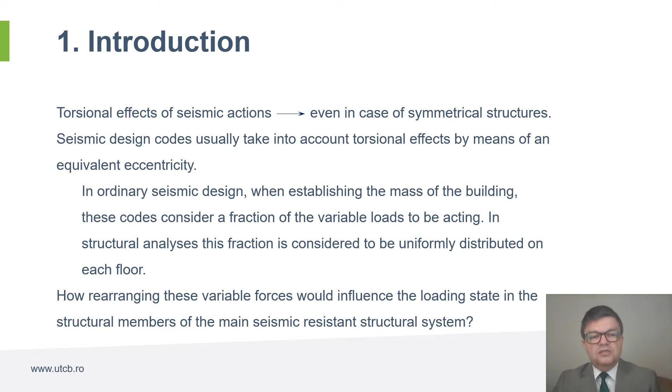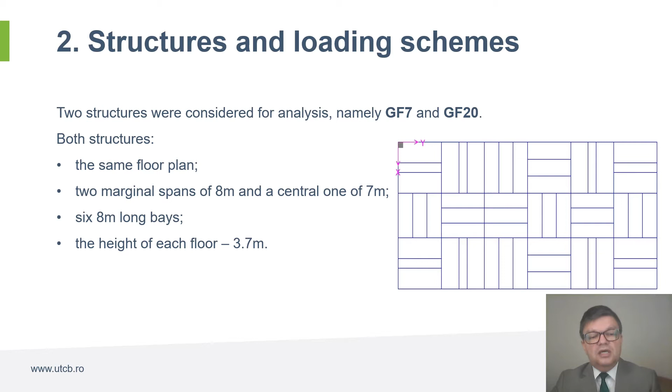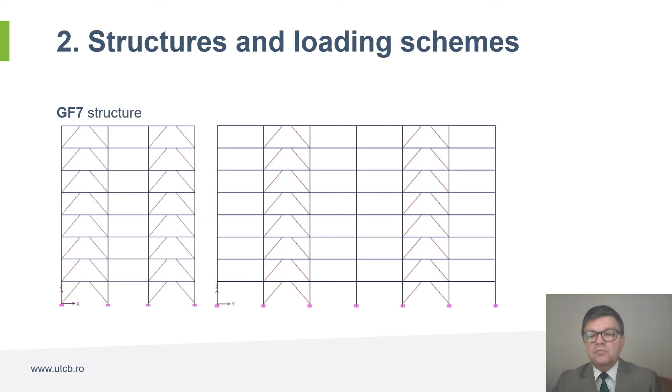We considered two structures having the same floor plan, one with 7 stories, another with 20 stories. The spans and the bays are about 8 meters, and the height of the floor is 3.7 meters. The eccentrically braced frames are placed on the side frames. For the 7-story structure we have this scheme, and this one for the 20-story structure, which also has an outrigger system.

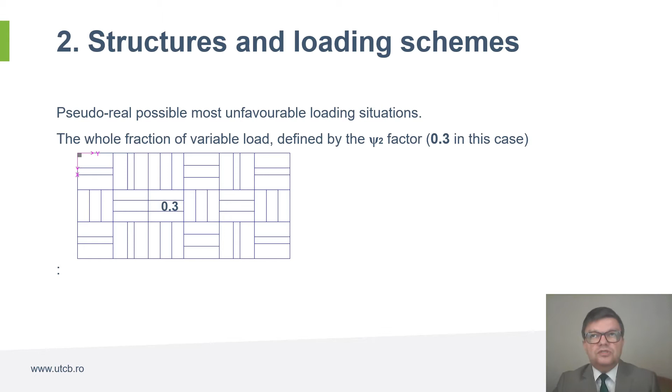Pseudo-real possible most unfavorable loading situations were considered, starting from the fraction of the variable load used for determining the mass. In this case it's 0.3 for office buildings, and we consider this load to be agglomerated on one side in the most unfavorable position, with a maximum factor of 1.5, which corresponds to the persistent design situations where the variable load has the dominant effect.

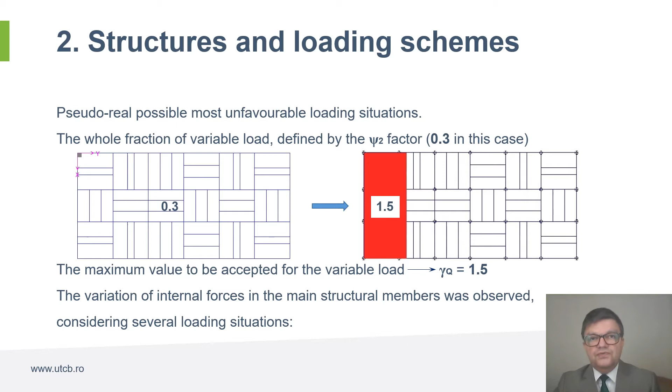Under these circumstances, we got 5 loading schemes. One is centric, used for reference. Then eccentric, which is what is used in seismic design codes, with an eccentricity of 5%.

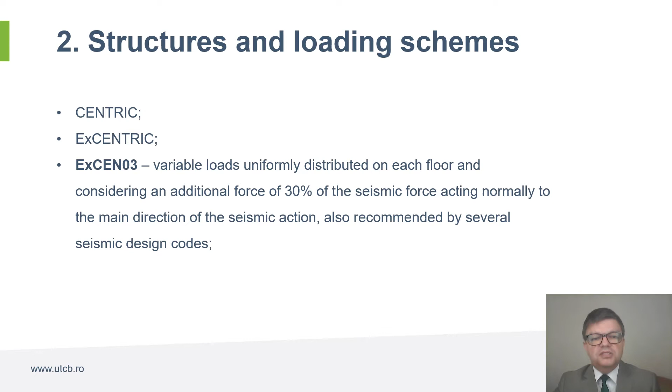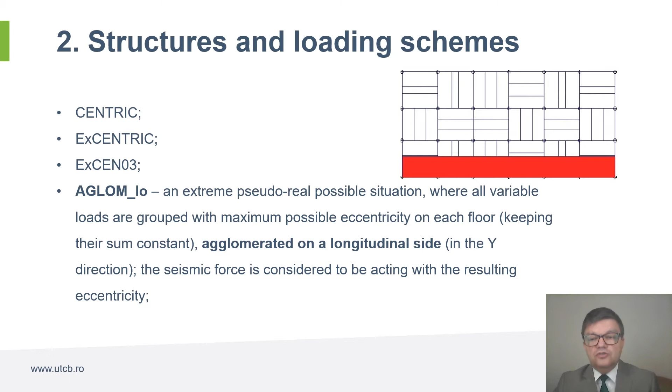Then ExCEN03, another loading situation from the codes, which considers the seismic force on one main direction of the building and 30% of the seismic force on the other main direction. Finally, we took two loading schemes that we considered: the variable loads agglomerated on the longitudinal side and on the transversal side.

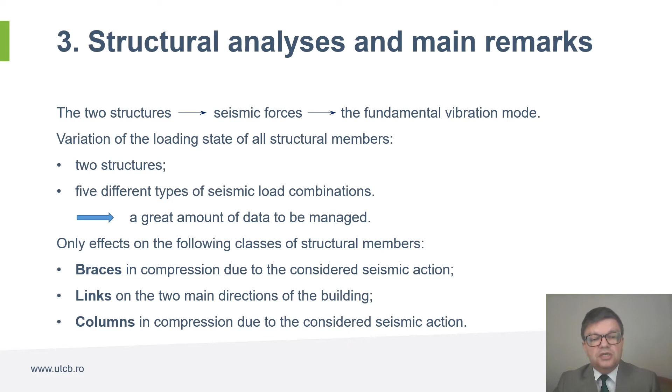Using these schemes, we analyzed the two structures and got a great amount of data. That is why in this paper we focused only on the braces in compression, the links, and the columns in compression due to the action of the seismic force. So we looked at the compression force in the braces and in the columns, and the shear force in the links.

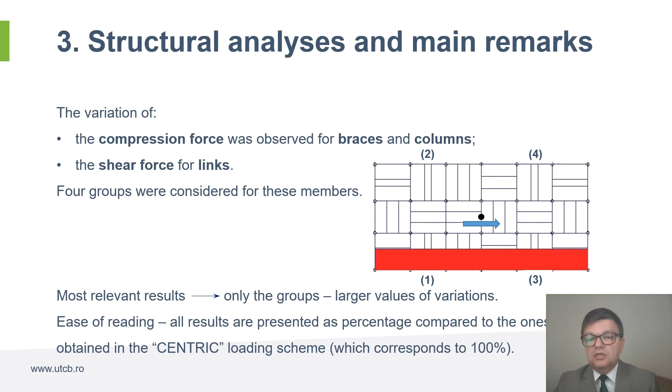We looked at the most loaded structural members, groups 1 and 3 on this image, where the torsion effect is more important than in groups 2 and 4. All references are made to the centric situation, considered to be 100%. So let's look now at some results that we got.

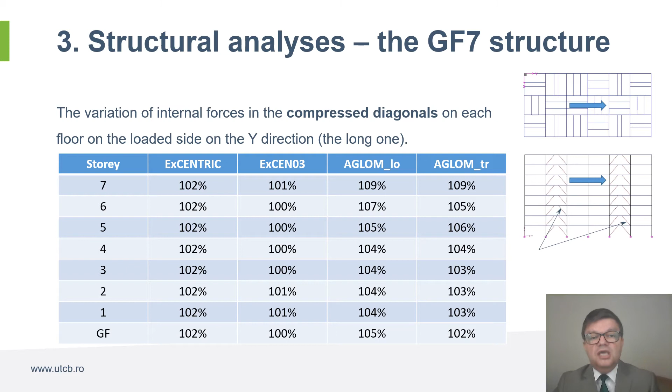If we look at the longitudinal direction, the influences are smaller but the same trend remains. Now we'll have a look at the links.

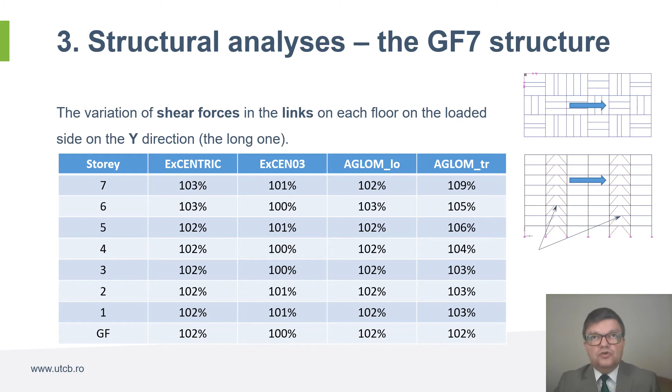And what we could notice till now, and keep on noticing, is that ExCEN03, considering the 30% action on the normal direction, doesn't bring much.

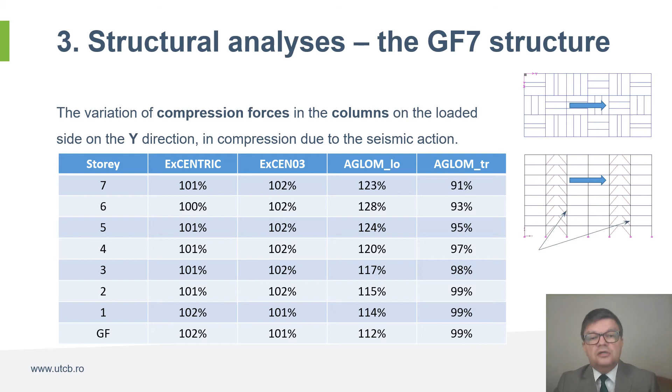Similarly, on the longitudinal direction, with somewhat smaller values.

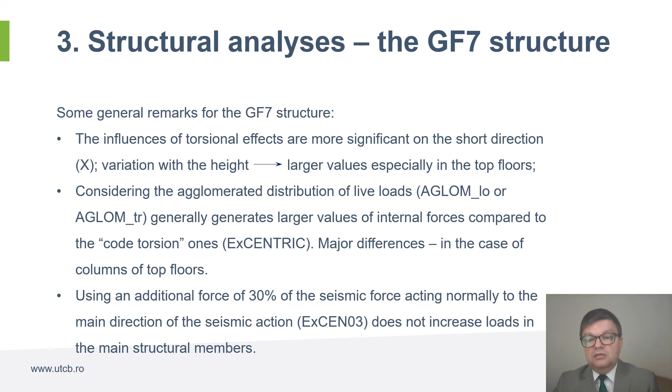To summarize some conclusions for the 7-story building: the torsional effects are more significant in the short direction, and agglomerated distribution generates larger values than what code torsion brings, with the major differences being in the columns at the top floors. Again, introducing the 30% force normal to the main direction of the seismic load does not bring anything important.

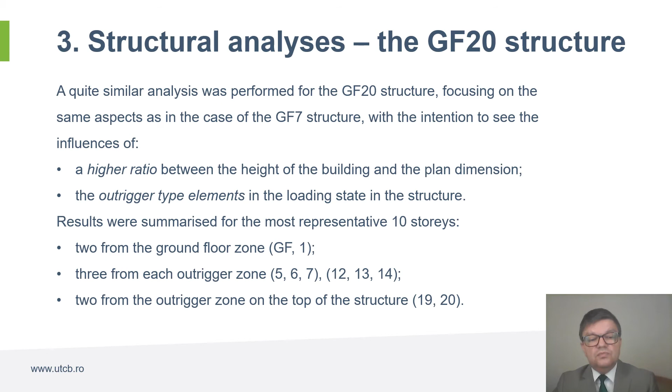Now, moving to the 20-story building, we considered the results in the most representative 10 stories: 2 from the ground floor, 3 around each outrigger zone, and 2 from the upper floors.

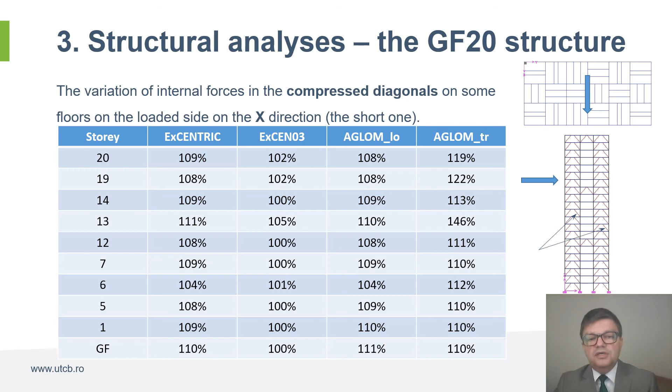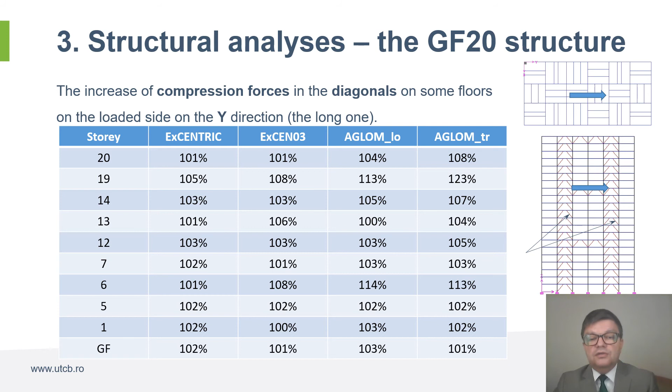Moving to the longitudinal direction for the diagonals, we see the same trend, increases but smaller than for the shorter direction, with concentrated increases in the outrigger part.

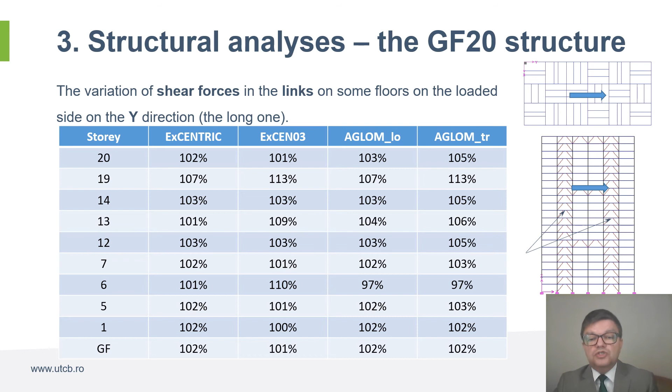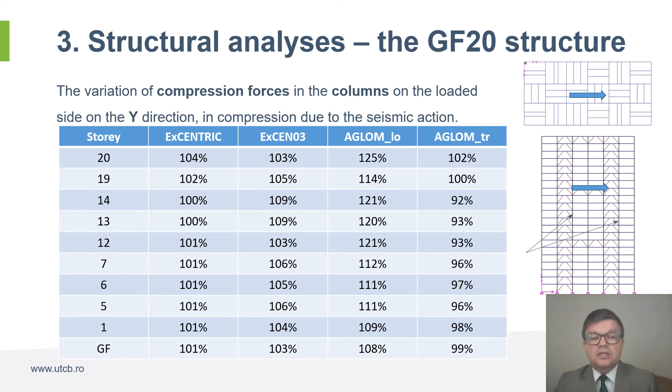Again, on the longitudinal direction, smaller values, and similarly for the compression forces in the columns, with increases of up to 30% in the neighborhood of the outrigger systems, and somewhat smaller values on the longitudinal direction.

To summarize some conclusions for the 20-story building: the effect on the short direction of the building remains more important in this case too. The agglomerated distributions we imagine give values larger than the code approach, and again the 30% approach doesn't bring much.

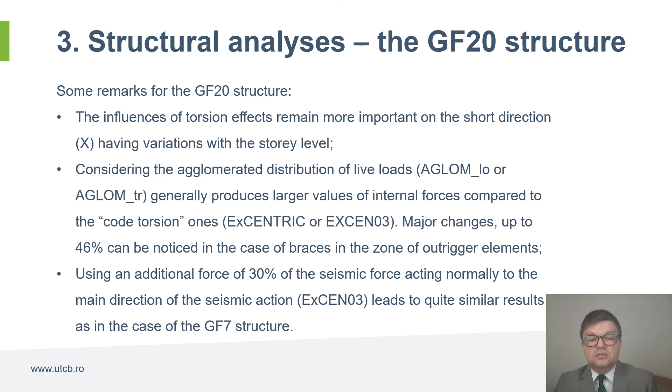Moving to conclusions: the effects of general seismic torsion are more important on the short direction of the building than the approach used in present-day codes. The 5% eccentricity is reasonable for this case, discussing an office building, but it would be different for an industrial building, where the ratio between variable loads and self-weights is different.

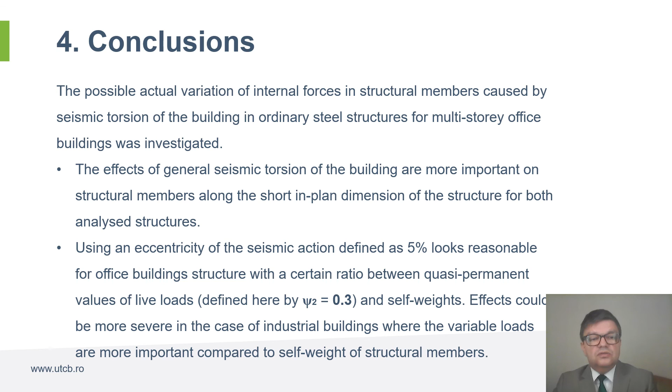Variation of internal forces with floor level is expected to be significantly less smooth if there is an outrigger system, where we noticed some important changes. And finally, using the 30% force on the normal direction doesn't lead to important changes in the case of brace systems.